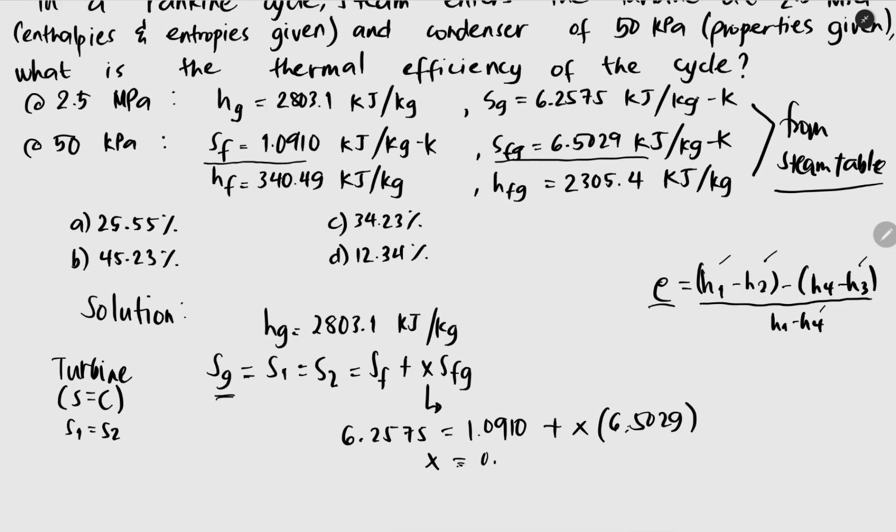So 6.2575. So alpha calculate 1.0910 plus X times 6.5029. So lalabas is yung ating 0.7945. Since we have already obtained the value of our dryness fraction, which is yung ating X na 0.7945, ang next natin na gagawin is kunin na yung H sub 2.

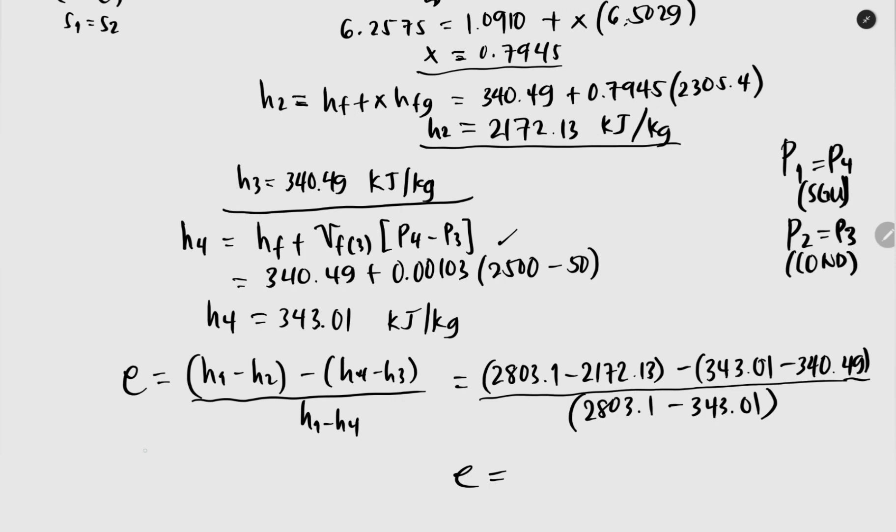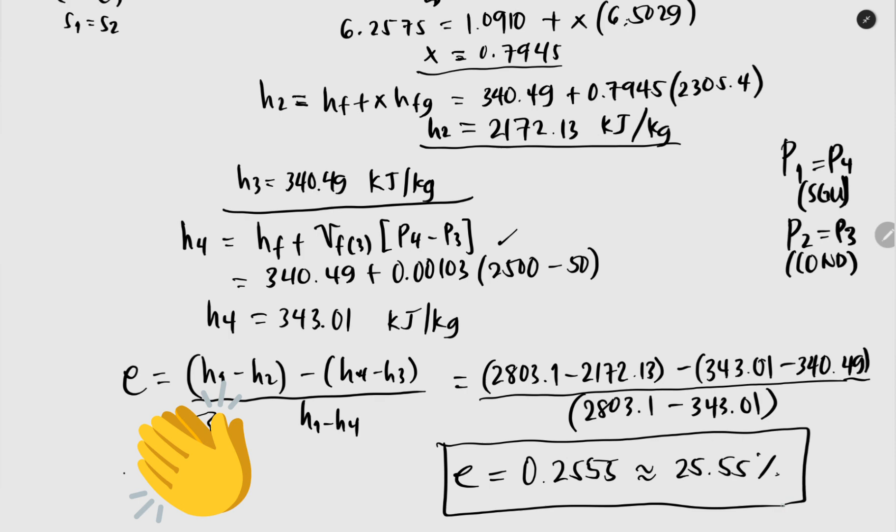So, 2,803.1 minus 2,172.13. So, quantity niyan, minus natin yung ating quantity ng 343.01 minus 340.49. So, divided by 2,803.1 minus 343.01. And lalabas sa sagot dyan, guys, 0.2555. Times 100 para makuha mo yung final answer na naka-percent: 25.55%. This will be our thermal efficiency of our Rankine cycle. So nandun siya, guys, sa letter A.